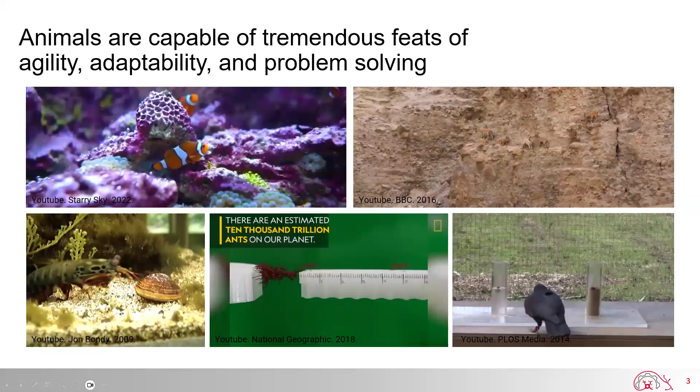To get us started, in my lab we often start by looking at animals. Animals are capable of tremendous feats of agility, strength, ingenuity, creativity, and learning. They adapt and respond to dynamic changes in their environment. They learn from experience, and they solve complex real-world problems. As an engineer, these are the capabilities that we want to achieve in future robotic systems.

So towards capturing these capabilities, in my lab, as I said, we focus on biomimetic, biohybrid, and biodegradable robots. We want to be able to learn fundamental principles of actuation and control by studying and modeling biological organisms, and ultimately even harness the material capabilities of living systems for future robotic solutions.

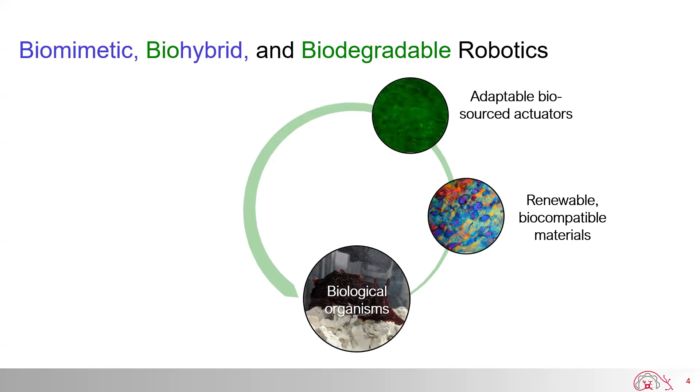We do this by identifying and characterizing renewable biocompatible materials and appropriate fabrication techniques. And then we use these materials to build adaptable living actuators and energy efficient living controllers. And the ultimate goal in my lab is to create soft, bio-inspired robots that can themselves safely interact with us.

And our environment. And in the future, we hope that these may one day even be made entirely of materials that are biodegradable and renewable, and that the use of these robots will then allow us to better understand the biological organisms that inspired us initially.

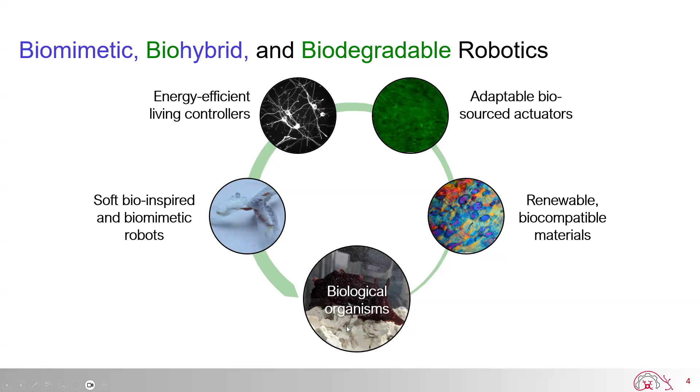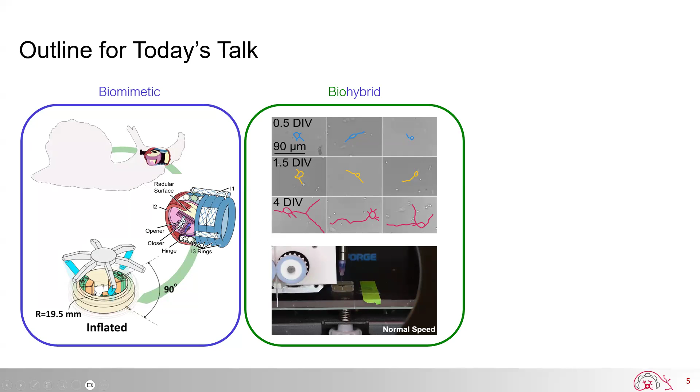So for today's talk, I'm going to share characteristic examples of our work in these areas. This will include our work in biomimetic robots as tools for basic neuromechanics research, and these have led to bio-inspired robots for applications in spaces like agriculture. From there, I'll discuss how we are building foundational tools in biohybrid robotics, including materials modeling and manufacturing capabilities. And I'll wrap up with some of our more recent work in creating biologically sourced, marine-derived biodegradable actuators.

So let's dive in. One of the key questions that drives the research in my group is how can animal principles allow robots to generate multifunctional adaptable behavior? We come at this from a very bio-inspired standpoint.

So to address this question in bio-inspired robotics, we want to try to use neuromechanical models and robots in order to actually capture animal behavior. For this, we need a tractable animal model that does generate that type of adaptable behavior.

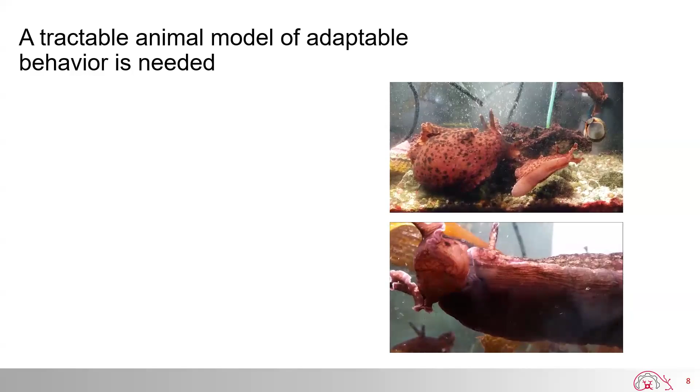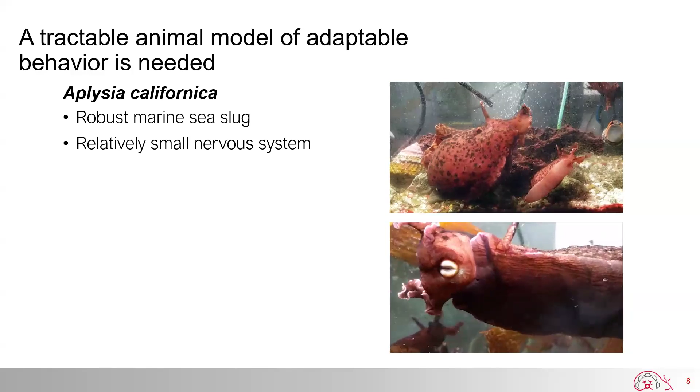And so we turned to the sea slug, Aplysia californica, which is the funky critter that you're seeing here. Aplysia is a robust marine sea slug, and it has a relatively small nervous system. In particular, we typically study the feeding behavior as a model of soft grasping, and the ganglia, the clusters of neurons that control feeding behavior, between the two of them probably only have about 4,000 neurons.

It's very feasible that we could actually study and model many, if not all, of the neurons in this structure. As such, it's been a model system in neuroscience for decades. It has a complex soft-bodied musculature—there's no skeletal system, so it's also an interesting mechanical problem.

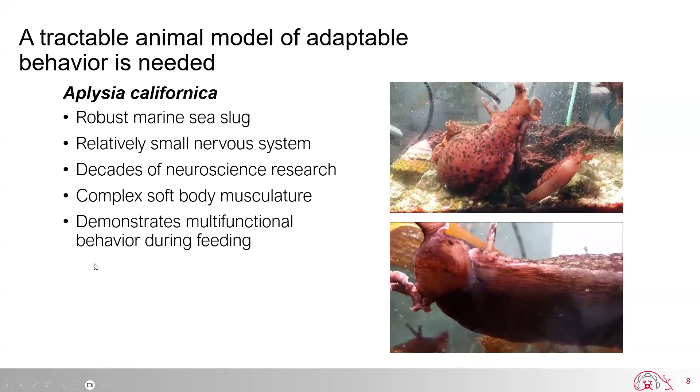It demonstrates multifunctional behavior during feeding. This includes biting, which is an attempt to grab seaweed—that's what you're seeing in this video here. There's also swallowing, in which that grasper closes on seaweed and pulls it in. And there's rejection, in which the animal is able to spit out inedible food.

With this all in mind, we look at the components of the system. These behaviors are all generated by a single soft feeding apparatus called the buccal mass, located in the head of the animal. The muscles within this structure are controlled by the buccal ganglion, which we can think of as a motor controller, and this receives higher level commands from the cerebral ganglion.

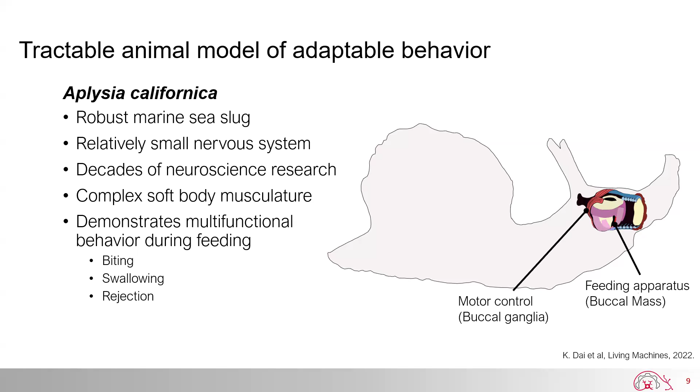We can break the problem of multifunctional behavior into two sections. First, we need to understand what neural units are needed to model multifunctional neural behavior. Second, we need to understand how the musculature itself is contributing to this behavior through morphological computation.

For the control model, as we were developing this work, our goal was to create a faster than real-time model that could predict multifunctional neural control patterns and generate that behavior in a biomechanical model. So to achieve this goal, we went and looked at the actual neural circuitry of Aplysia.

That was our tractable animal model, and we needed a computationally efficient modeling framework. So we created a hybrid Boolean continuous model of this feeding behavior, and I'll get into the details of what that looks like next.

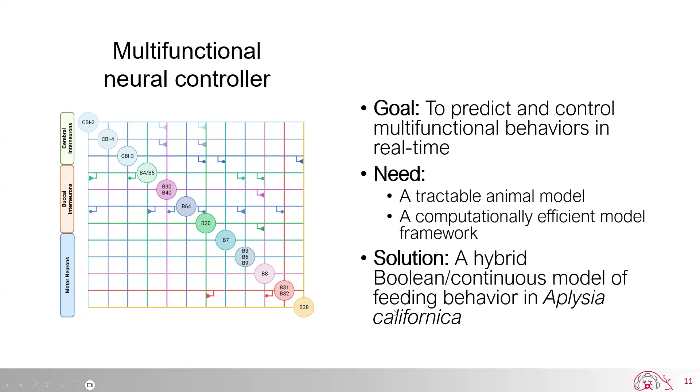To start, we assess the key neurons and muscles involved in feeding behavior on an individual basis. And we do this in close collaboration with neuroscientists who are actually doing these recordings in the animals.

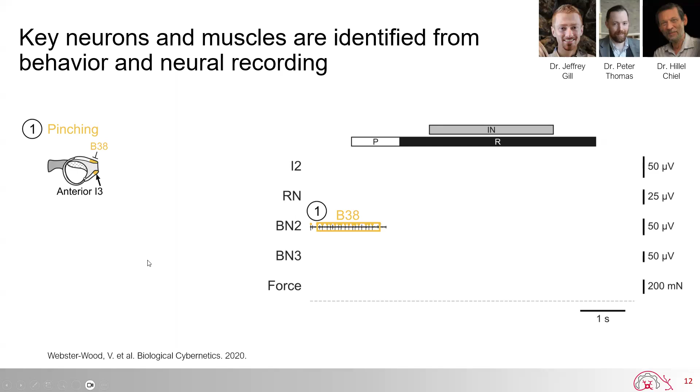For example, in swallowing, there are four phases of behavior that are observed. This starts with pinching, in which the front of this feeding apparatus, the jaws, closes on the seaweed in order to hold the food. Then that grasper apparatus that we saw in the videos is protracted forward, where it closes, and then it's able to be retracted back and push the food into the esophagus. This cycle repeats, thereby generating force on the seaweed.

Our neuroscience collaborators can go implant electrodes in the animal and actually collect this neural recording data, either through EMG recordings with hook electrodes on the muscle or with directly implanted probes in neurons or hook electrodes on the nerves that those neurons innervate.

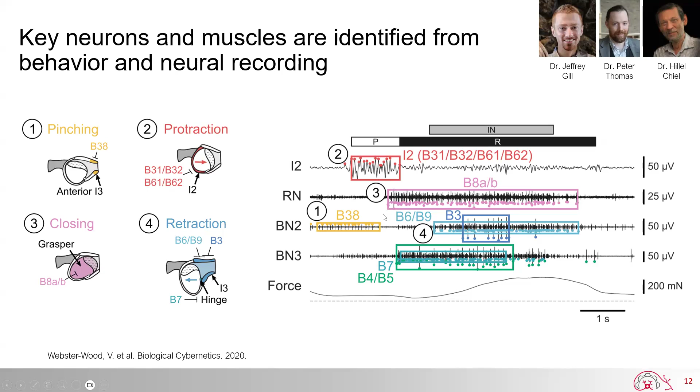We can approximate this neural activity in each of these boxes as a Boolean burst. So the neuron can be considered as either off, represented by 0—this is when the neuron is quiescent—or on, represented by 1, that's when the neuron's firing. So we created this network based on this idea of approximating firing as these Boolean bursts.

To build the network, we start with our team's prior work and the existing literature, and we build the network in layers. First, we create this motor neuron layer based on the key neurons we identified in our recordings. Next, we build an interneuron layer—these coordinate the activity of the motor neurons.

Then we build a cerebral interneuron layer, where these are kind of like those higher level commands that control behavioral switching. And each of these neurons is a known unit in the slug's nervous system that we can consistently identify experimentally.

External sensory cues are applied to the cerebral interneurons. This gives kind of context of what feeding state we want to be in, and the motor neurons project onto a simulation of the biomechanics of the feeding apparatus, which then provides sensory feedback, and that's input into the interneuron layers.

With this model, we're then able to run predictive simulations, and we find that the model qualitatively reproduces the three key multifunctional behaviors.

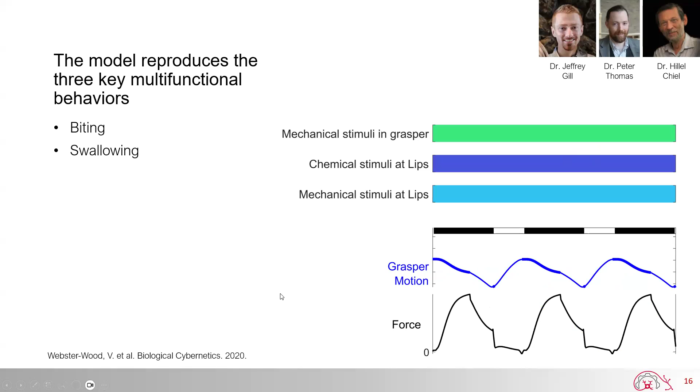It also produces swallowing just by changing the sensory stimuli. So here, if there's mechanical stimuli in the grasper, that means there's seaweed in the slug's mouth, and so it's going to try to swallow. Swallowing is characterized by this strong retraction as force is applied to the object.

The model also reproduces rejection. So if there's no chemical stimuli, then it probably means the thing you're holding onto is not seaweed, and so the animal is able to push the seaweed out with this strong rejection force.

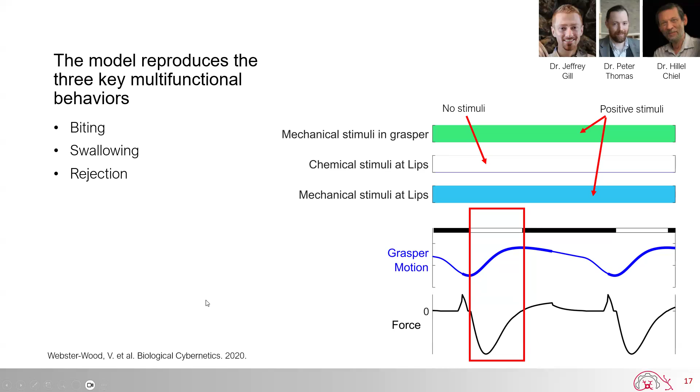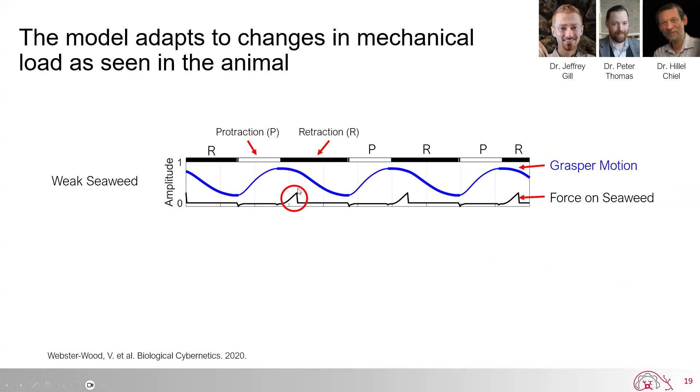It can also produce multifunctional behavior even within a single one of these behaviors, which we tested by simulating seaweeds of varying strengths. If we simulate a weak seaweed, the grasper moves through that protraction-retraction cycle. The force on the seaweed during retraction starts to rise until you reach a force threshold that we've specified, and then the seaweed breaks. This behavior with the weak seaweed looks much more like a biting pattern, just like we see in the animal.

Okay, so that's very animal centric, right? In our initial neuromechanical models, we implemented a very simple approximation of the biomechanics. Really, we just modeled the grasper and the head as two point bodies connected by springs to represent the elasticity of the musculature, which was a very pleasant surprise—that even those simple approximations with these neural models are able to generate interesting behaviors.

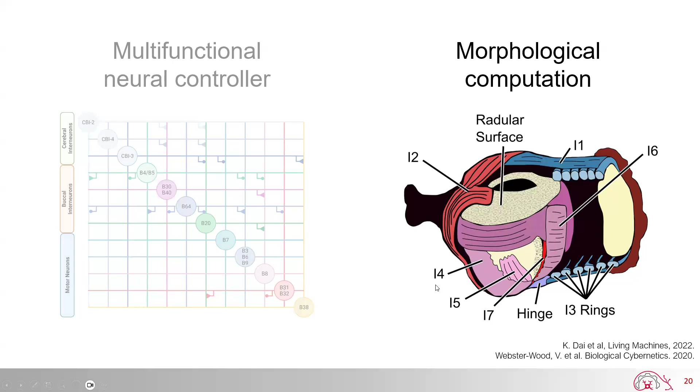And so this is where we start to turn to robotics. We can build robotic models of the feeding apparatus in order to test biological hypotheses of control and identify which features are really helping generate that multifunctional behavior, so that we can translate them to other robotic applications.

In this robotic model, we include physical representations of important feeding muscles and structures. For example, the primary retractor muscle, I3, and these external I1 muscles are mimicked using McKibben-style pneumatic artificial muscles. These are fabricated using an internal bladder housed inside an overexpanded mesh sleeve. The mesh restricts the motion of the actuator during expansion, thereby causing contraction along the axis of the actuator.

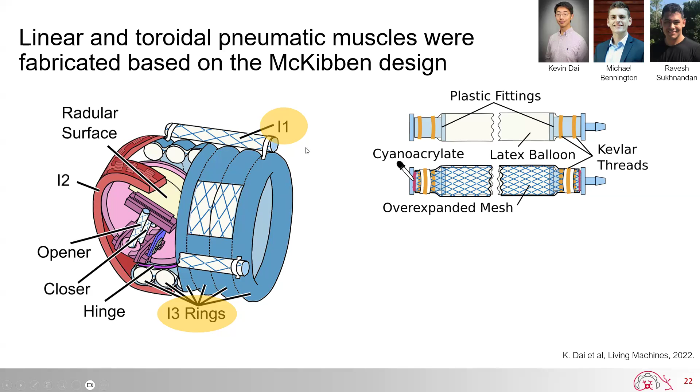The I1 muscle uses a standard linear McKibben design, and the I3 muscle was approximated as a series of toroidal rings. In order to achieve the larger contraction ratios we needed to mimic the sea slug's muscles, we fabricated these in-house using a latex balloon as the internal bladder, because it allows us to get really good contraction ratios with relatively low pressure. We adhere the latex balloon to plastic fittings with Kevlar thread and cyanoacrylate in order to create a really strong seal.

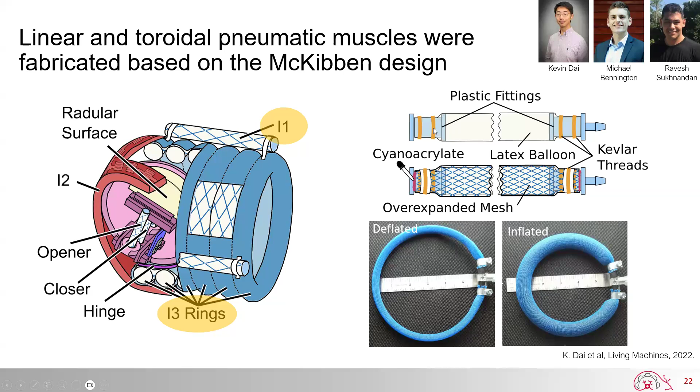For the primary protractor muscle, I2, this is a very interesting muscle—it's kind of a broad Y shape, and it's exceptionally thin. To mimic this geometry and the fiber orientations we needed in the muscle, we created arrays of flat artificial pneumatic actuators by modifying a technique from Wirekoh et al.

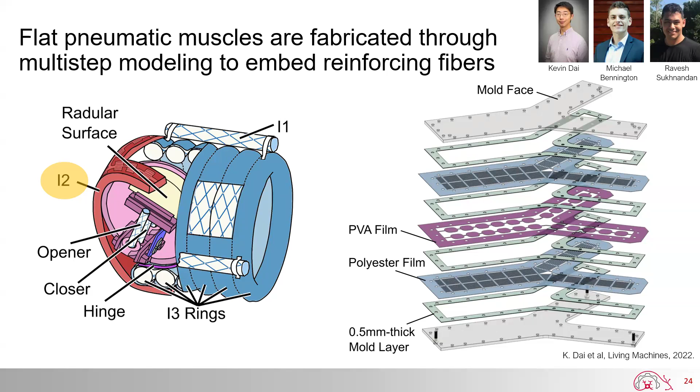They used dissolvable PVA films and reinforcing Kevlar threads to create flat pneumatic actuator units, like the ones we fabricated here. We adapted this to our application by creating a stacked mold approach, where we sequentially assemble molds to cast different layers of elastomer and embed reinforcing polyester films, which were cut with a Silhouette Portrait 2 to get the fiber orientations we wanted. We lay this all up with Smooth-On Dragon Skin 10, and once that's cured, we wash out the PVA film using deionized water.

For the grasping apparatus, we built this internal mechanism that is also actuated by linear McKibben actuators. And we replicate the soft jaw structure of the sea slugs using this reinforced rubber sheeting, which goes over a force sensor so that we can detect that sensory input at the jaws.

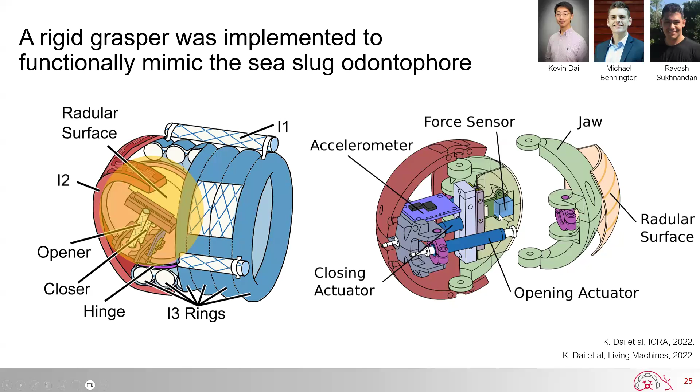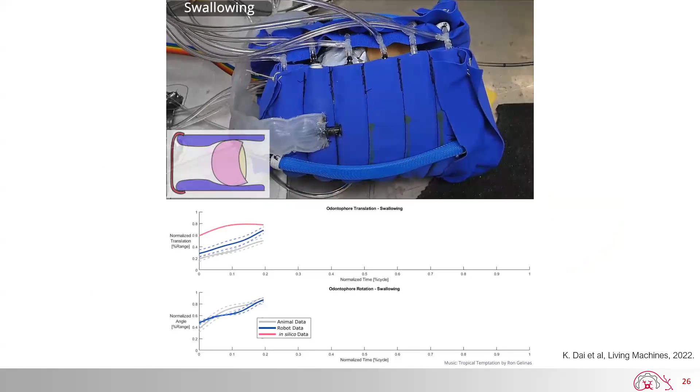And then we bring all these pieces together. And if I can get the video to play, we're then able to connect the robot to that model of the sea slug's neural system to generate behavior.

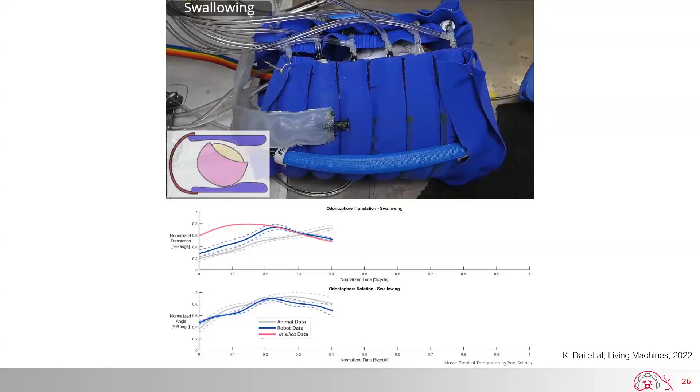So here you see the grasper rotating forward. It's going to grab onto this tube, which is representing the seaweed in this case. And then the I3 will actuate and push that grasping apparatus backwards such that the seaweed is deposited out of the jaws.

And of course, it moves very slowly. Sea slugs move very slowly. So we do dynamically scale all of our models to make sure that we're moving in the same dynamical regime.

So we first compared the robot's performance in both biting and swallowing to the performance of our original simulation and found that the robot does produce qualitatively similar behaviors.

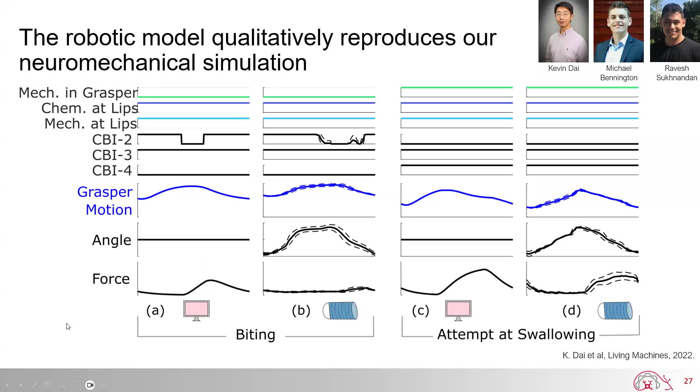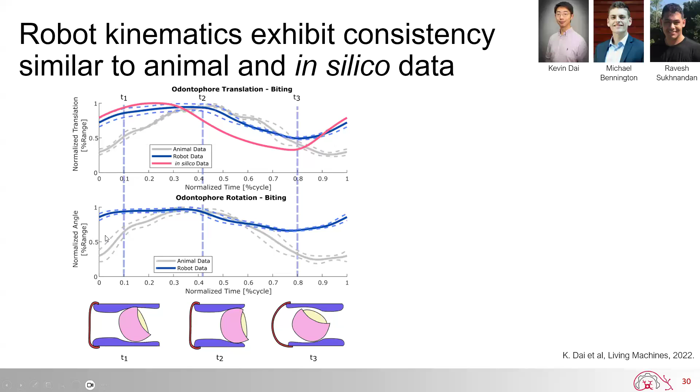But more importantly, we're now able to compare the robotic performance to the actual animal data. And we do this both for biting, looking at the translation of that grasper, and for rotation. And we find that both for biting and for swallowing, there are a lot of similarities in the behavior of the robot and in the behavior of the animal.

And yet, there are differences in timing, differences in amplitude that really point to additional research hypotheses about what features of the musculature or the nervous system are critical for this behavior. And so this creates a kind of feedback loop with the neuroscientists to keep iteratively identifying new features both in the animal and applying those to the robots.

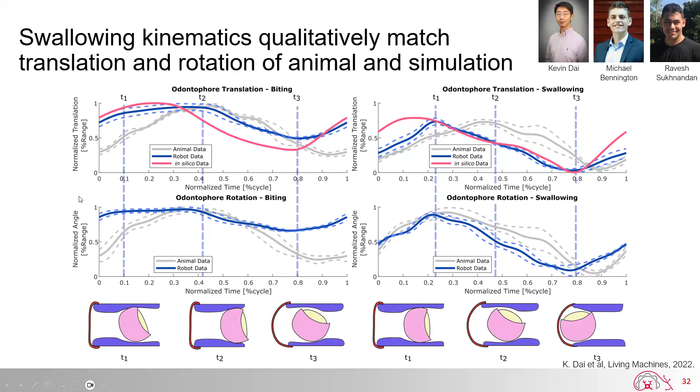So this allows us to use these kind of biomimetic robots in basic neuroscience research, but we also start seeing areas of inspiration for more general soft grasping robots.

In the sea slug, of course, we have this buccal mass, we have the buccal ganglion, and we have the cerebral ganglion, and we can think about these from a very biological standpoint. But we can also abstract these to see how they might apply more broadly in robotics.

For example, you can consider the muscles as viscoelastic adaptable actuators. You can consider the nervous system as an adaptable controller capable of learning. There's the presence of time history dependent actuator control through neuromodulation. And we've got these jaws with tunable stiffness.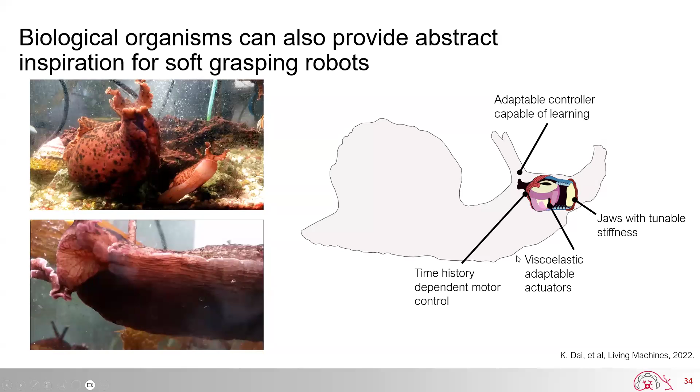And so based on these principles, we are now developing engineering systems that capture each of these features. So we abstract this onto a soft grasper.

And for this initial prototype, we took inspiration from the radial contraction of the I3 and the tunable stiffness of the jaws. And we can, again, use similar techniques to our biomimetic robot in order to fabricate this soft grasper.

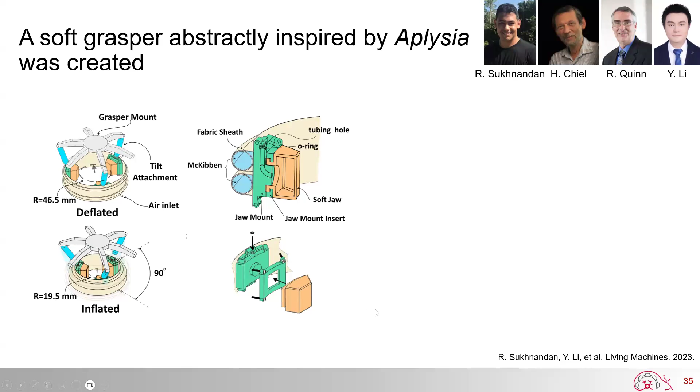And you can see this all assembled here. And so we can tune both the displacement of the circumferential actuator and the stiffness of the jaws by varying the pressure in the system.

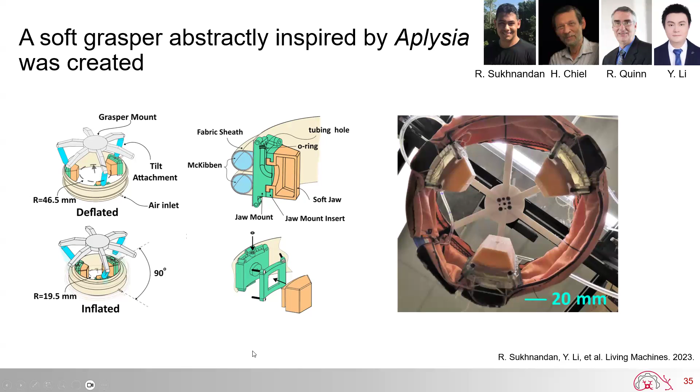To control this, we're again taking inspiration from computational neuroscience, and we use an approach called synthetic nervous systems. So these basically capture bioinspired network dynamics using a rate-based model of the neuron. Unlike traditional ANNs, each neuron captures...

Sorry, my headset turned off. Biologically plausible dynamics by modeling an axonal and a soma membrane with conductance-based ion channels and synapses.

The original representation of synthetic nervous systems, if you go into the literature, is a continuous time representation, but we're now working on discretizing this.

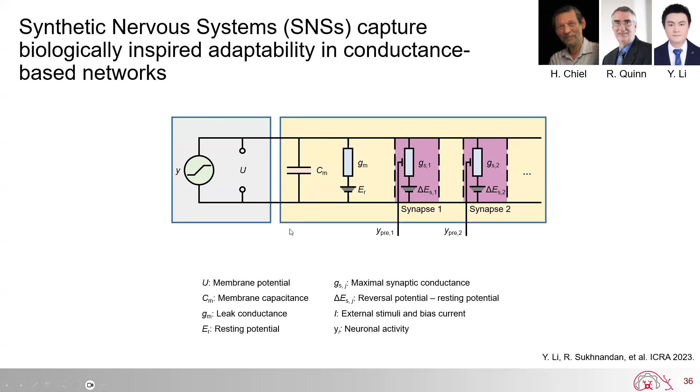So using these neural units, we can build a grasping controller taking inspiration from the hierarchical structure of the sea slug nervous system without having to mimic every single neuron.

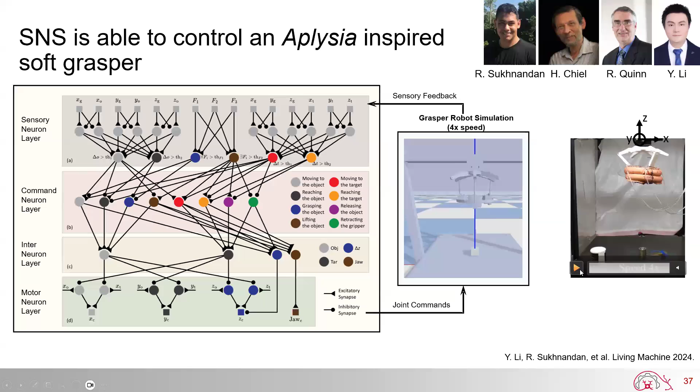And excitingly, the controller tuned in simulation in this way actually quite easily transferred to the physical hardware with minimal retuning. And so you can see again, if I play these, the performance of the simulation and the grasper when under control of this system.

This grasper is capable of pick and place operation with a wide variety of objects, including really fragile objects. So now we've tested obviously with eggs, as all soft grasping robot people do. We've also tested with tomatoes and avocados, and are working on doing tests with really soft clay currently to really understand the damage and deformation.

And what we also see is that even with these kind of bio-inspired features, there's really a trade-off between grasping stability and damage on the object. And if you try to take a naive approach to this and set force thresholds or position thresholds, you're likely to bruise your very fragile agricultural objects.

So inspired again by the sea slugs, we take inspiration from neuromodulation, which you can think of as a time history dependent adaptation. In the animal, we see this as stimulation of certain muscles at a very low, almost sub-threshold level, ultimately leading to stronger contraction of subsequent stimulations. We can mimic this with our synthetic nervous system neurons and apply this to our hierarchical neural controller. In particular, we add neuromodulation in the jaw contraction, as well as some feedback pathways in the rest of the nervous system.

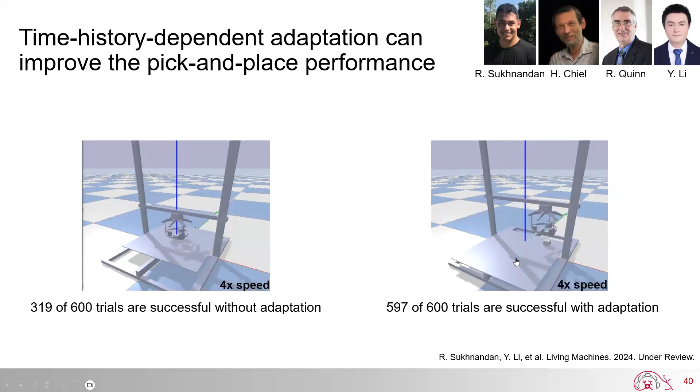Taking this adaptation first to our simulation for both position and velocity type control, we see that this really improves grasping performance. So here, without adaptation, using a velocity controller to avoid high contact forces, we get about a 50% success rate in grasping. But when we allow adaptation, the success rate improves dramatically.

We also tested this on the physical system. Here you can see some examples of grasping with and without adaptation. Without adaptation, the grasper tries to repeatedly pick up this heavy object and continues to fail over and over again. All 10 trials without adaptation failed. But with adaptation, the grasper is able to slowly adapt its force and pick up heavy objects without a priori knowledge of the weight of the object.

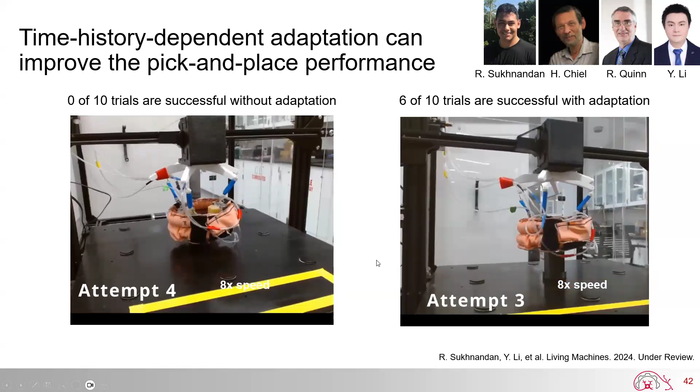Most recently, just as a little teaser, we've also been working on discretizing the synthetic nervous system network so that we can use more standard ML techniques like backprop to train the network and learn parameters. In some initial prototypes, just trying to train specific functional subnetworks, we find that the SNS, when in discretized form, is able to learn appropriate parameters for nonlinear relationships with a very sparse network, much faster than the same size ANN.

So that's super cool. Okay, so that gets us through the biomimetic side of the lab. And I do want to spend a little bit of time on the biohybrid and biodegradable side of the lab.

As we all know, an unfortunate reality facing us in the coming century is that natural disasters and supply chain interruptions are only likely to increase. These supply chain disruptions impact us as researchers as it becomes more challenging to obtain the parts we need to build robots. But we also need to consider the downstream effects of our robots.

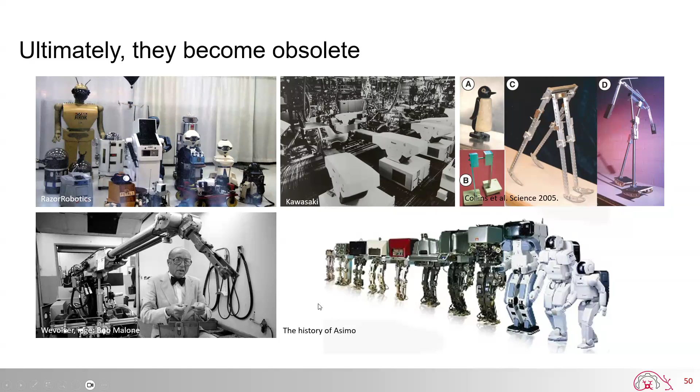Now, I of course acknowledge that consumer electronics, our phones, our laptops, our cameras, these have a far greater impact on the electronic supply chain and the growing piles of e-waste. But since our job as researchers is so often to think forward and consider the future of our field, I pose to all of you a challenge to think about the long-term environmental effect of our research.

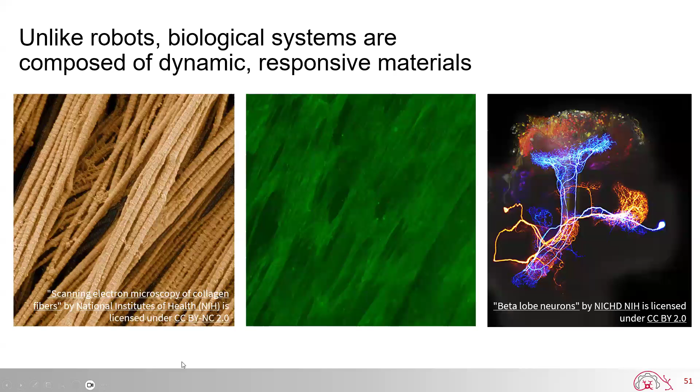In contrast, animals are composed of sustainable, biodegradable materials that are adaptable to their environment, and already have many of the features that we look for in robotic systems. So one of the things we do in my lab is look at how we can leverage the desirable properties of living materials directly in robotics.

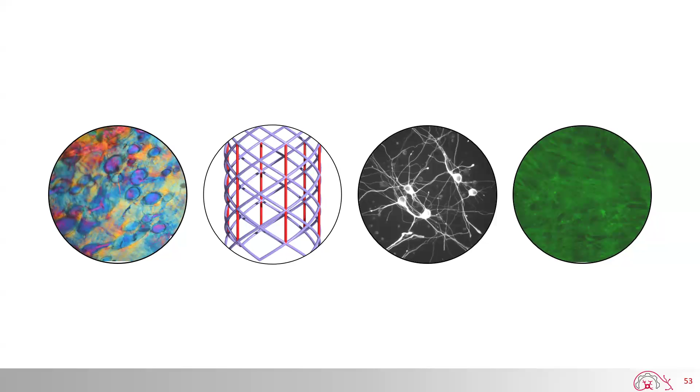We consider this in the materials themselves, in the structures, in the controllers, and in the actuators. Although biohybrid robotics has received growing interest over the past several years, challenges remain in adapting these approaches. In particular, there are current limitations in the types of robots that can use muscle-based actuators because of the very soft, compliant nature of muscle. This includes high barriers of entry for new researchers and the lack of biological controllers that can be predictably programmed. So we're making some small strides in these spaces.

Starting off, I'll highlight some of our work in manufacturability of ECM-based components. One material that shows a lot of promise for biohybrid robotics is electrocompacted and aligned collagen.

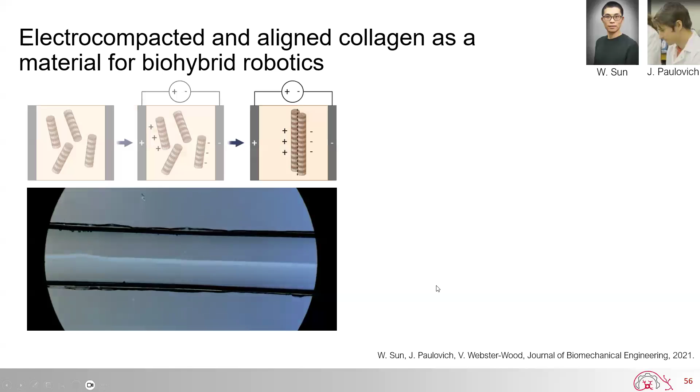We fabricate this material by introducing a collagen solution, just isolated from tendons typically, between two electrodes. By applying a current across these electrodes, the collagen molecules become charged and they compact along the isoelectric point. Using this technique, we can fabricate really robust collagen threads and sheets, and with chemical cross-linking, we can get their strengths even up to approaching those of sutures.

What's really exciting about this material is that the alignment of the collagen can also be used to align muscle cells that are seeded on the sheets.

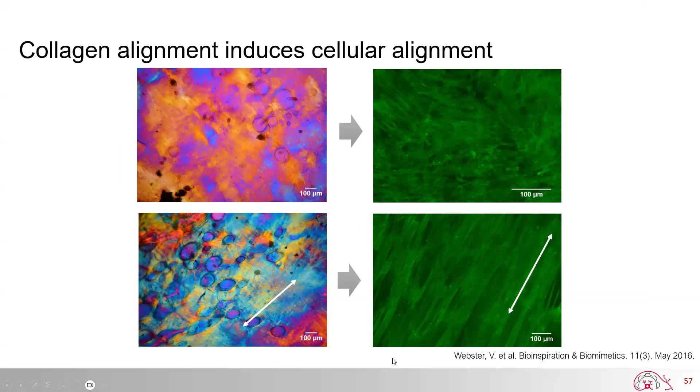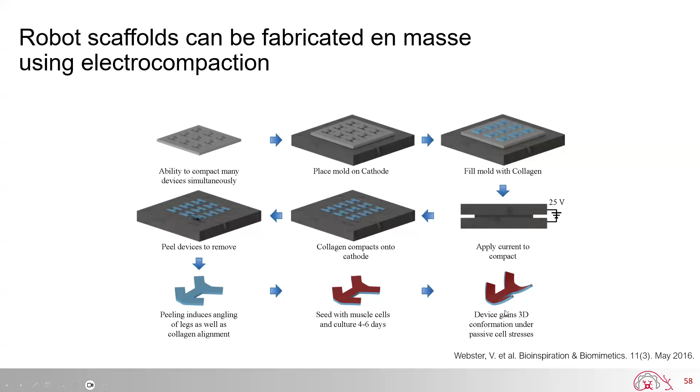We've used this approach previously to create little tiny, millimeter scale collagen robot skeletons. We seed these with muscle cells, and then under the passive stresses of the cells, these robots take on a 3D shape and can be stimulated. And they'll crawl, very, very slowly. I promise this robot is moving.

These early prototypes with these materials really indicated that there are some limitations when working with biohybrid actuators, including limited deflections and low muscle forces when using monolayer cultures.

So to overcome these, we started by looking at the skeleton material. There's a lot of manufacturing knobs that we can tune when working with this electrocompacted collagen, including the time of compaction, the voltage, and the concentration of the collagen.

And what we were interested in is how the factorial modification of these manufacturing parameters affects the final geometry and mechanics of the threads.

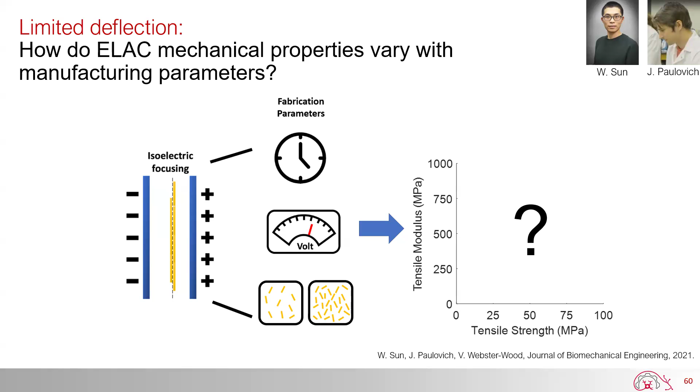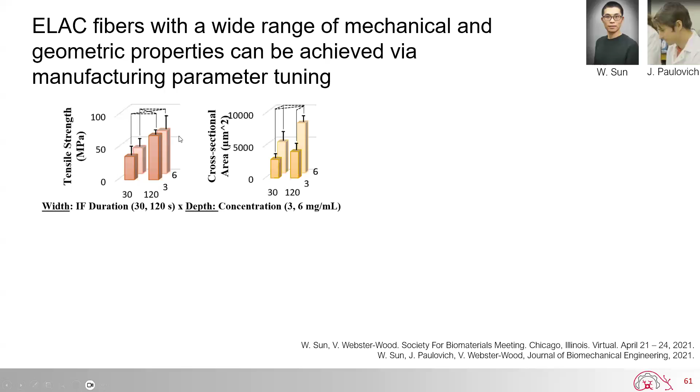I'm not going to go through all the study results, but if you're interested, this work was published a number of years ago. Some of the key takeaways include that ELAC fibers made with longer IF durations showed significantly higher tensile strength, failure strain, and a larger cross-sectional area. And ELAC fibers made with lower voltage exhibited significantly lower tensile strength, modulus, and cross-sectional area. Interestingly, we saw joint effects of these manufacturing parameters.

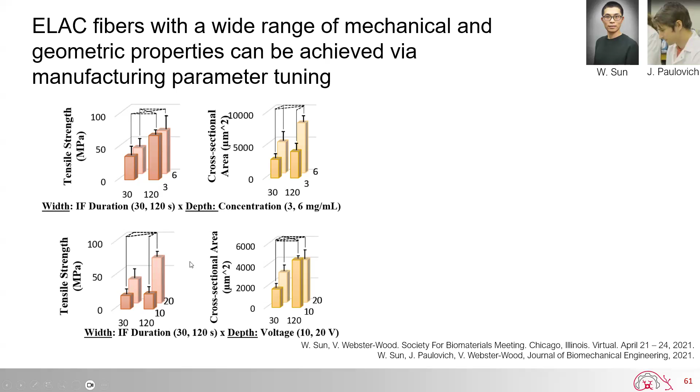Together, these allow us to really have a wide range of mechanical properties that we can achieve with these materials, and thereby allow us to control the resulting properties of any cells that we're going to grow on them.

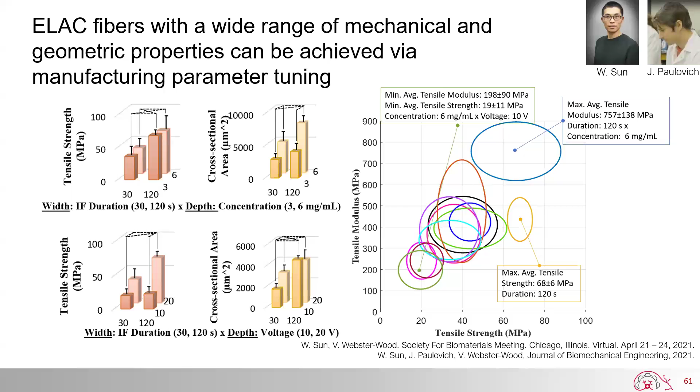The other challenge facing some of those early biohybrid robots was that muscle, when you grow it just as a single layer, forms really immature muscle tissue. It is not nearly as strong as mature adult muscle tissue. Recently, we've seen a lot of work moving into 3D culture of these muscle tissues, and this shows a lot of promise.

So we've moved from these flat cantilever style robots into 3D printed robots with these 3D muscle tissues. These are typically cast around the 3D printed structure, or some of them now are being bioprinted in order to create the geometry of the actuator. And these are all relatively small scale, and the robots themselves are relatively soft.

And there's a lot of challenges in interfacing these types of muscles with a robotic structure, just because of the mismatch in the mechanics, right? If you try to connect a really soft muscle to a rigid structure, tears are common. We're lacking that kind of mechanical gradient that we have in our actual skeletal muscle system.

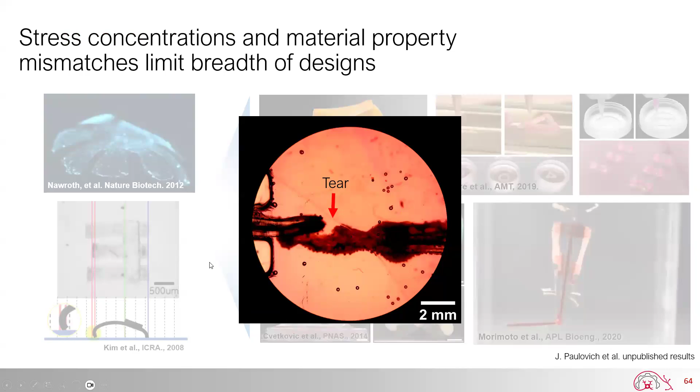So this brings us into some work that we're doing towards manufacturing reinforced structures for these biohybrid robots. In particular, we're working in the bioprinting space, and we have been collaborating with Dr. Adam Feinberg, who developed the freeform reversible embedding of suspended hydrogels technique in order to integrate fiber reinforcement into bioprinted muscle.

In this fresh printing technique, you extrude your bioink into a shear thinning support bath, and this allows you to print very small, very intricate structures, even with overhangs, out of hydrogels, which would otherwise be too soft to hold their own weight.

And so you can see here kind of how flexible and squishy these little hydrogels are.

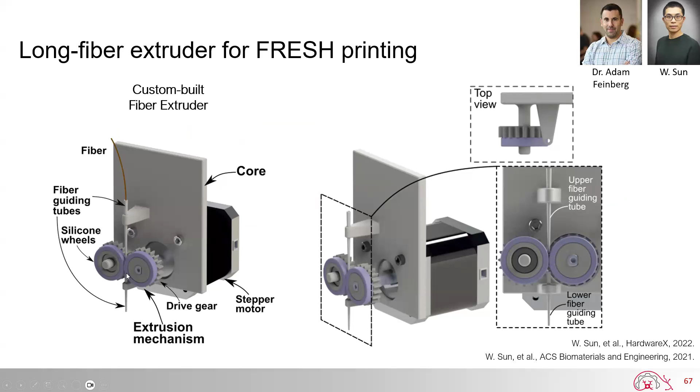To overcome this, we developed a custom long fiber extruder for fresh printing. So we can extrude prefabricated fibers through the interaction of these two driving wheels into our extrusion needle, which then goes into that support bath.

This allows us to do multi-material printing, where we can first print the hydrogel. In this case, we're using alginate, which is a hydrogel derived from seaweed. And then we can switch print heads and embed these fibers, and then again print layers of alginate on top to fully encapsulate the fiber.

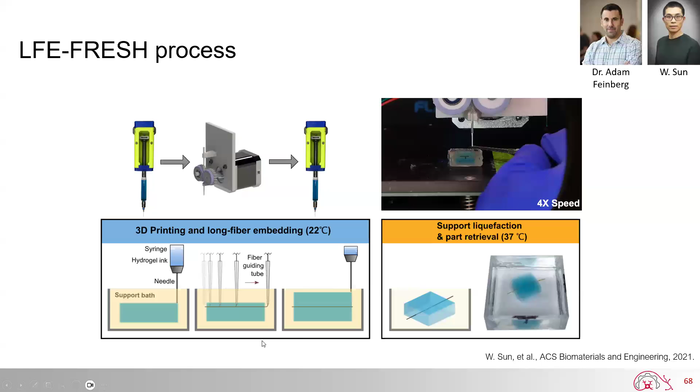The support bath can be liquefied in order to retrieve the part just by raising the temperature, and it essentially melts the gelatin microbeads that make up the support bath.

Of course, this process is essentially trying to push a little bit of thread into Jello. And so the printability of any given fiber is going to depend on the fiber and the hydrogel properties. If the fiber is too compliant or the gel too stiff, the fiber will buckle.

So we've developed analytical and computational methods for the printing process in order to allow us to provide a printability model, and we validated this experimentally across a number of fiber types and sizes.

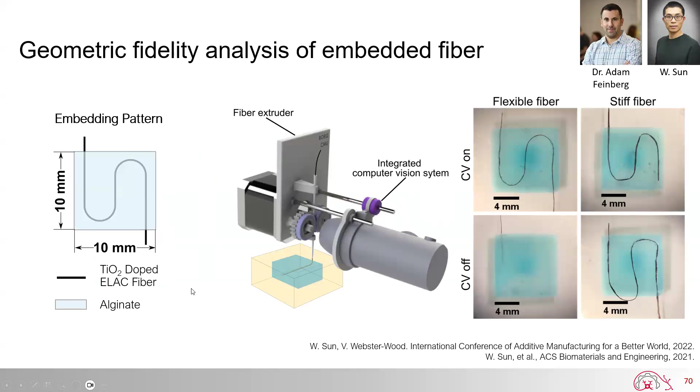Additionally, we found that closed loop control based on computer vision actually allows us to identify buckling early and adjust the extrusion rate to prevent print failures.

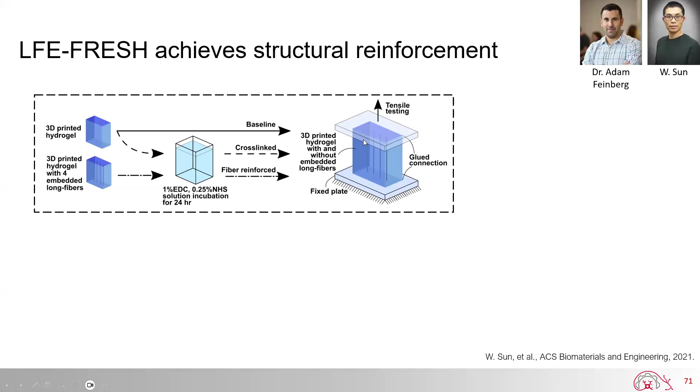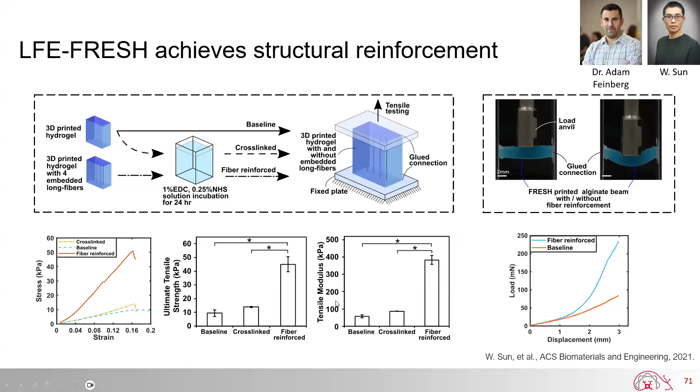So this technique, I think, is broadly applicable in soft biocompatible robotics. We've printed now with a number of different thread types, so little tiny metal wires, custom threads, polyesters, silks, single ply, double ply, triple ply, the collagen fibers themselves. And we can print them into both alginate hydrogels and collagen, and I'm sure many others as well.

We can print one fiber at a time or multiple fibers, and we can print in 1D, 2.5D, or even 3D. And so we're now working towards integrating this with the muscle tissue in order to create better transitions between the muscle and the robot and get better biohybrid robot outcomes.

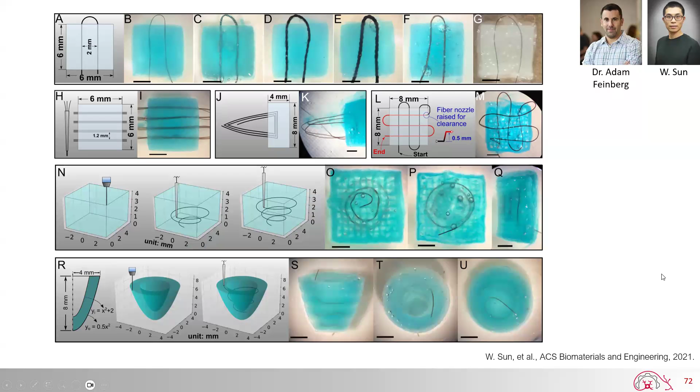Okay, I'm going to change gears a little bit and talk about how we're looking at the neural networks in these systems as well. One challenge in working with muscle tissue in robots is that the muscle really performs best when stimulated via the natural neural circuitry.

So if you just electrically stimulate muscle, it fatigues very quickly, and it has kind of low force capabilities. Whereas if you stimulate by motor patterns in the ganglia, it performs much better. So we're trying to understand how we can design neural networks composed solely of biological neurons to generate and program behaviors.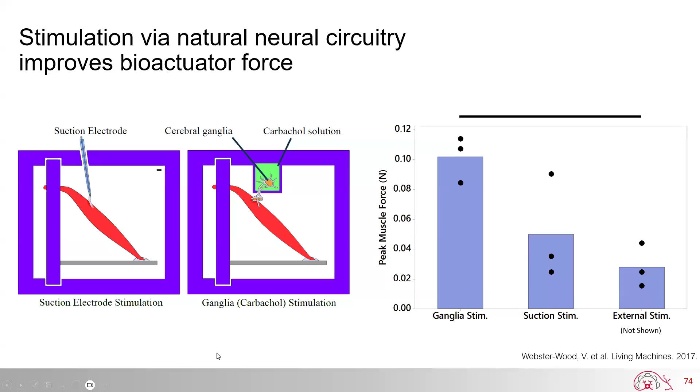To do this, we're starting by really quantifying the growth patterns of neurons in vitro. And so from this information, we can identify metrics that we can use to both drive neural models, but also validate neural models against experimental data.

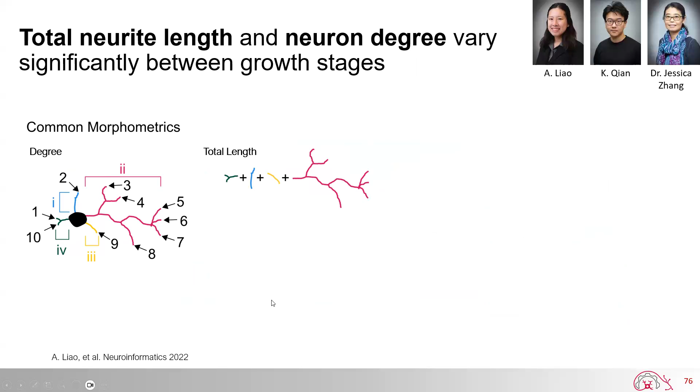These include things like degree, total length, tortuosity, and we quantified this over a tremendous number of neurons. The poor undergraduate students and Ashley spent a ton of time even just hand tracing these.

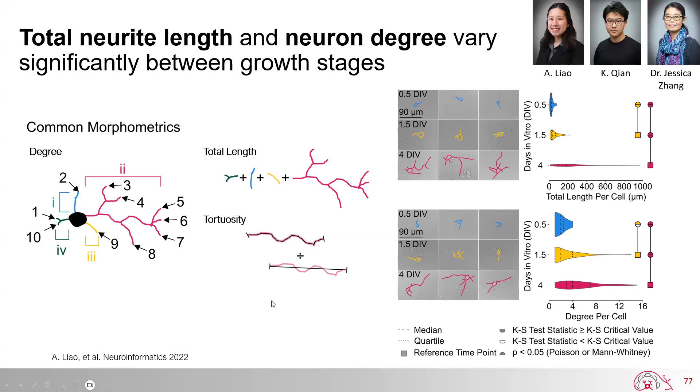And we can use these combined with some new morphometrics like change point test quantification, where we have a segment length and a number of change points, and find which metrics really tell us what phase of growth the neuron is in.

These distributions can then be fed into neural models to predict the formation of networks before we spend the time and resources needed to actually grow these in culture dishes.

So now we're working on connecting these to those dynamical models, similar to those that you saw in the early part of my talk.

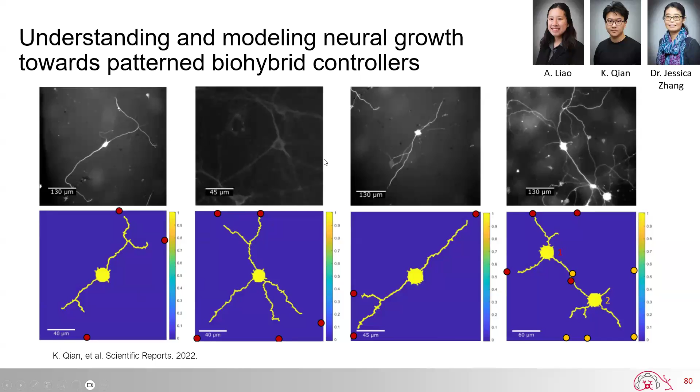To wrap us up, I'll share a bit about our recent work in biodegradable robots. It's very challenging to work with muscle tissue as an actuator, but biologically derived materials have a lot of advantages for large-scale deployment in sensitive ecosystems. If we want to release swarms of robots into a coral reef or other fragile zones, we don't want them to get lost, break down, and become microplastics and heavy metals. So we've been adapting our alginate printing technique to create fully biodegradable robotic actuators.

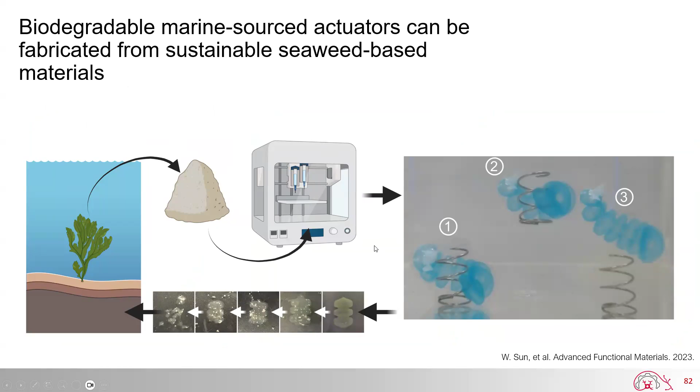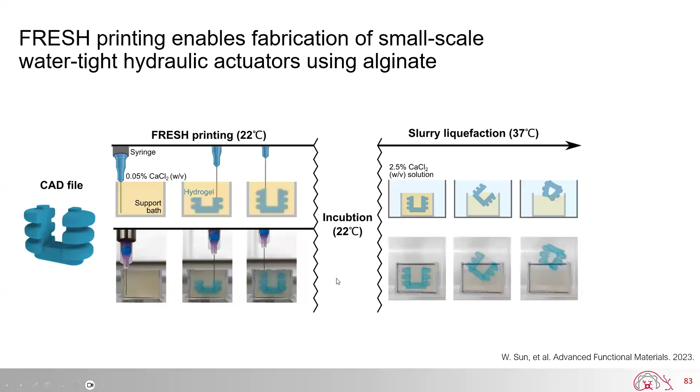We use the FRESH printing technique I introduced earlier, starting by creating CAD designs, which we then print with alginate in a gelatin support bath. The support bath contains calcium chloride, which cross-links the alginate, and we incubate the structures to allow that cross-linking to achieve water tightness. The support bath is then liquefied, and we can recover the part.

With this approach, we can build linear actuators, bending actuators, and tiny grippers able to pick up a wide variety of small, rough, fragile, and even slippery objects in aqueous environments. We can also print actuators that would be very challenging to cast - here we've got a twisted bellows that gives an almost elephant trunk-like motion, which can be used to pick things up or hook things.

We can also print networks of these actuators. Here we have 3 actuators, each with their own pressurization channel, giving us positioning of the end effector. We've now used this to build tiny robot arms.

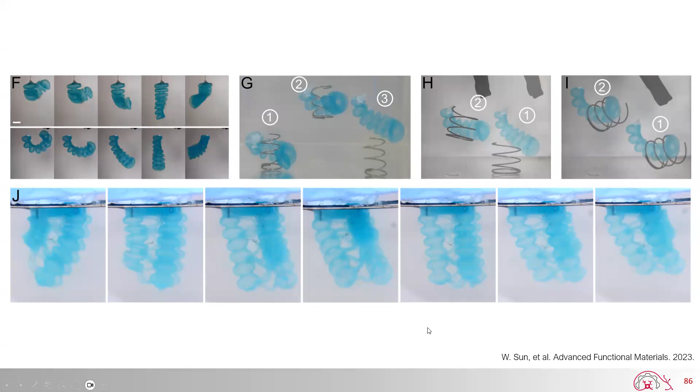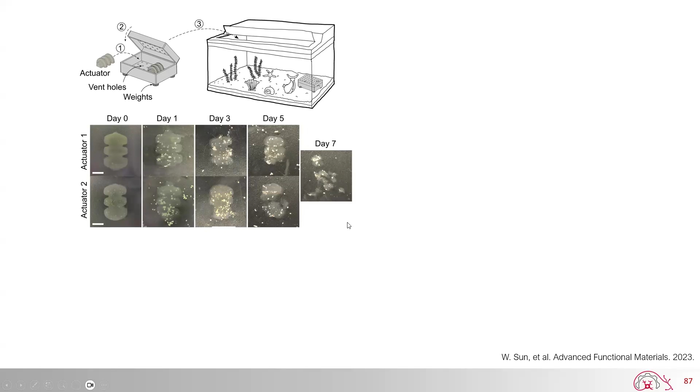But I think the most exciting feature of these actuators is that they're biodegradable - they can safely degrade in natural environments. We tested this by introducing the actuators into our sea slug aquariums, and here you can see they degrade over about 7 days with our current cross-linking configurations. The actuators are even edible and digestible by marine invertebrates - here we're feeding actuators to a sea slug and assessing that, yes, it has been digested.

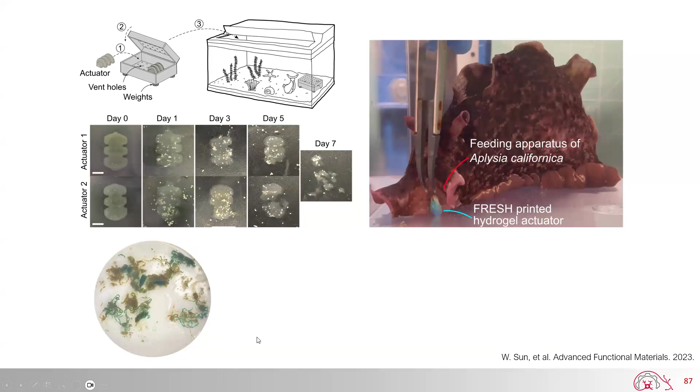Because these actuators use calcium for ionic cross-linking, we can also do rapid degradation. So if you needed to suddenly self-destruct your robot, you can introduce chelators, and the actuator will just come apart into alginate monomers.

We're still working with a number of limitations with these actuators, trying to translate them so that we don't need an external source of pressure. But they're really helping push the boundaries of what we can achieve with biodegradable soft actuators. In fact, we're seeing weightlifting capabilities higher than those currently seen in muscle-based actuators, while having similar degradation timescales. We think this is a really exciting approach in biodegradable robotics.

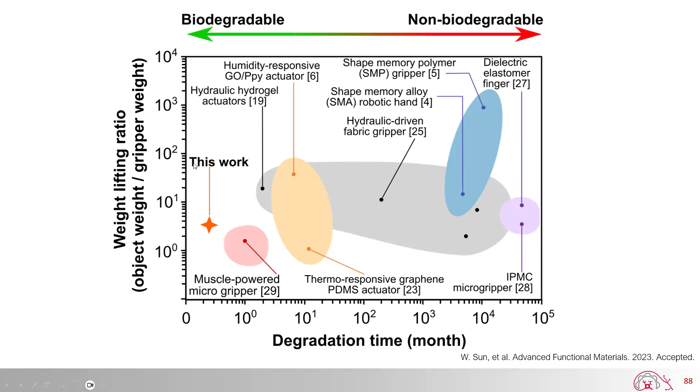I'm starting to run out of time, so I'll wrap up with some future work. We're continuing to advance each of these fronts I've introduced today. In the biodegradable material space, next steps focus on packaging and life support for actuators to protect them from environmental contaminants, as well as scalable manufacturing - right now there's a lot of grad students with tweezers and pipettes building robots in my lab.

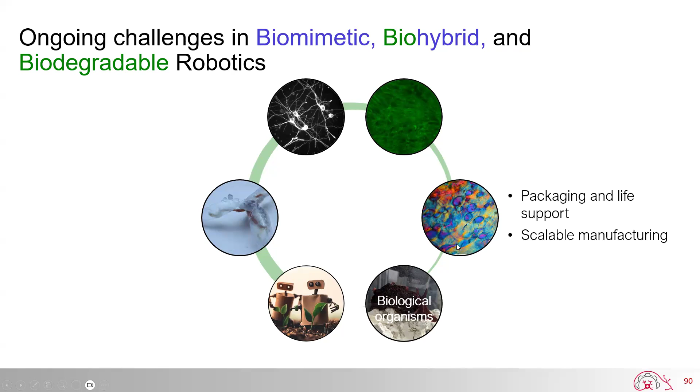We're also working on improving the force capabilities of bioactuators, as well as translating the principles from our muscle-based actuators into synthetic actuators with bio-inspired mechanics. We're continuing to work towards programmable living controllers made with biological neurons, adapting the dynamics and network structures from these biological neurons into biomimetic controllers.

We're starting to develop design tools for working with these strange materials. Robots that degrade present a very challenging design and control problem - how do you design a controller when the mechanics of your robot vary over time? Can you even leverage that to do behaviors you would otherwise not be able to achieve? Ultimately, our hope is that this all leads us to autonomous, biodegradable robots.

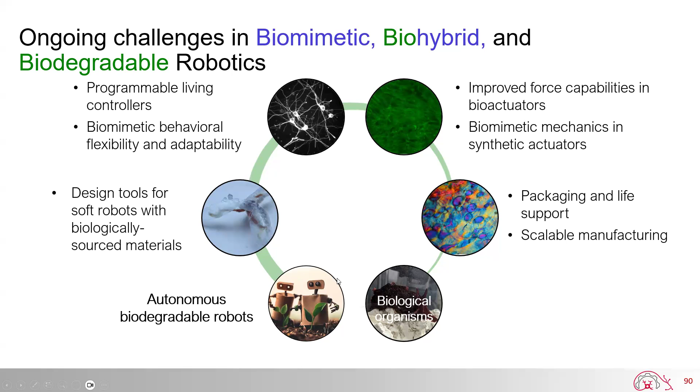I'll wrap up by acknowledging the wonderful people who actually do this work, as well as our amazing collaborators and funding sources. Most of this work has been funded by the NSF and the Army Research Office. I'd be happy to take any questions.